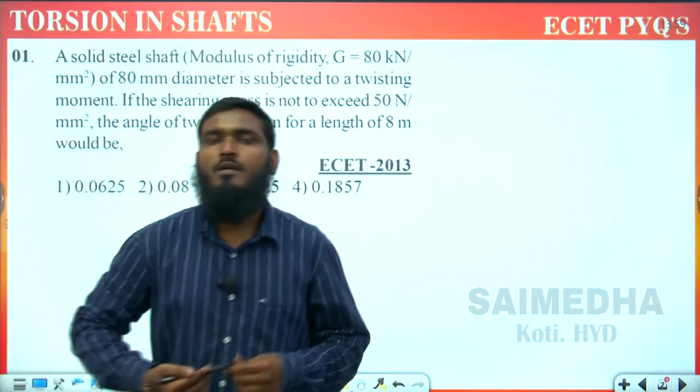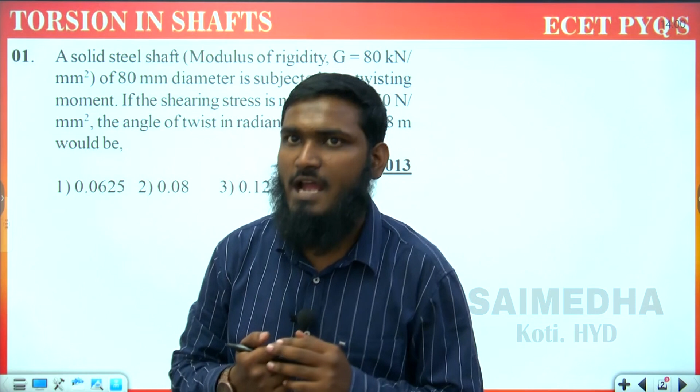In this video we are going to discuss the previous year ECET questions on the topic of torsion in shafts from strength of materials. As we have completed all the remaining topics, this is the last chapter we are having in strength of materials, which is torsion in shafts.

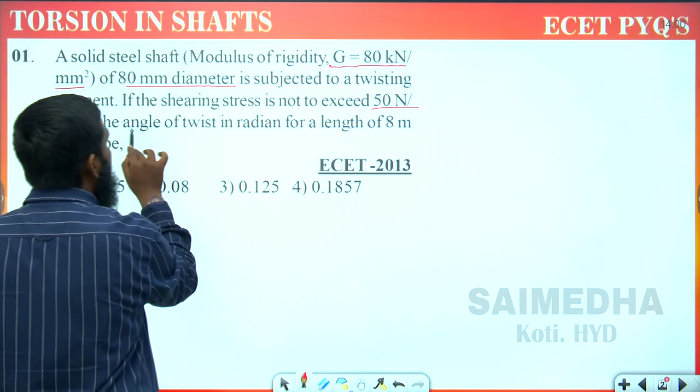Let us complete these questions also. Now, the first question: a solid steel shaft with modulus of rigidity G equals 80 kilonewton per mm square, 80 mm diameter, is subjected to a twisting moment. If the shearing stress is not to exceed 50 newton per mm square, find the angle of twist in radians for a length of 8 meters.

We have to find out the angle of twist over here. So first let us write down the given data. What is the given data we are having over here? It is the G value—first let us write the G value.

G value is equals to 80 kilonewton per mm square. The mm square part can remain as it is; only the kilo will convert. Converting this part, 80 into kilo means we take it as 10 cube newton per mm square.

Now the next part, what is given over here? Diameter is given, and it is equals to 80.

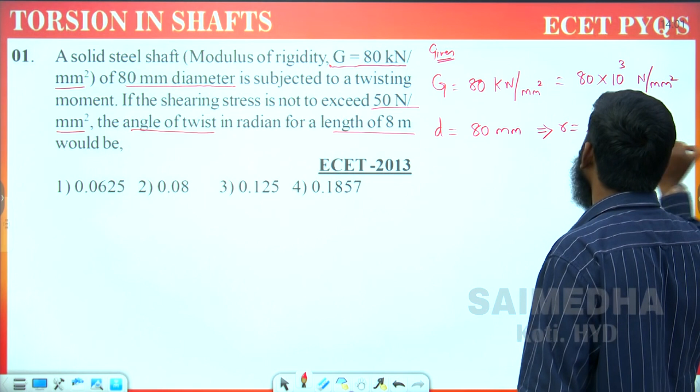Okay, 80 mm we are having over here, 80 mm we have taken. Then we have to find out the radius. Radius means what we can do now? D by 2 is equals to 80 by 2 means 40. So R value we are taking it as 40 mm. Okay, so 40 mm we have taken.

Now next part what we are taking over here, we are having it as shear stress. Shear stress is equals to 50 Newton per mm square. Okay, so it is in newtons and mm square is correct only.

Now next part, length. Length we are having it as 8 meter. 8 meter is equals to what we can write, 8 into 10 cube mm. Okay, 8 into 10 cube mm. This part we have taken over here. So all the given data we have written.

Now what we have to find, actually angle of twist we have to find out. So what is the main formula, general formula we are having? T by J is equals to tau by R is equals to G theta by L. What we are having? G theta by L.

Now according to the given data, let us check with which case we have to take over here. We are having G value, we have to find out theta value, L value we are having, tau value we are having, R value we are having. Okay, so let us take this case over here.

If you are taking this case, now if you want to find out theta value, theta is equals to what we can write now? Theta is equals to tau into L divided by R into G.

Okay, now let us substitute all the values what we are having. Tau value is equals to 50, into L value what we are having, 8 into 10 cube. Okay, now divided by R value we are having, 40, into G value what we are having. G value is equals to 80 into 10 cube. Okay, 80 into 10 cube.

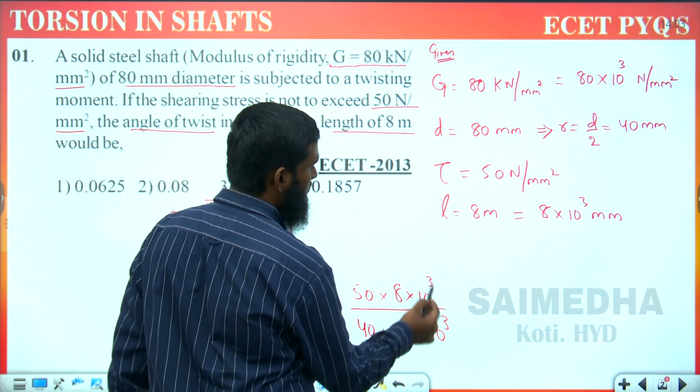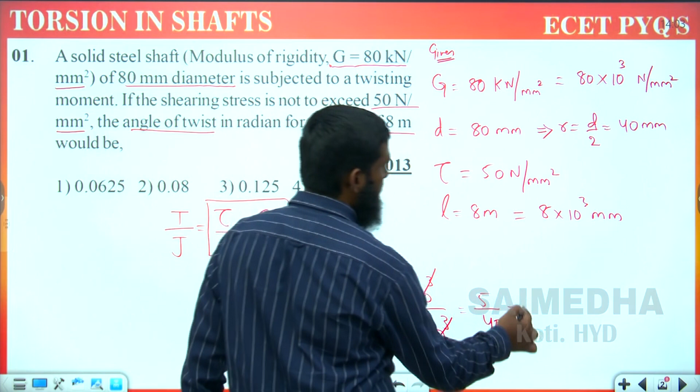All these values we have substituted. Now let us do the simplification. 10 cube gets cancelled, 0 gets cancelled, 8 gets cancelled. It is equals to 5 by 40. If you are dividing this part, what answer do you get? 0.125. Okay, what we are getting the answer? 0.125 means the third option.

Third option is correct. Now let us go with the next question.

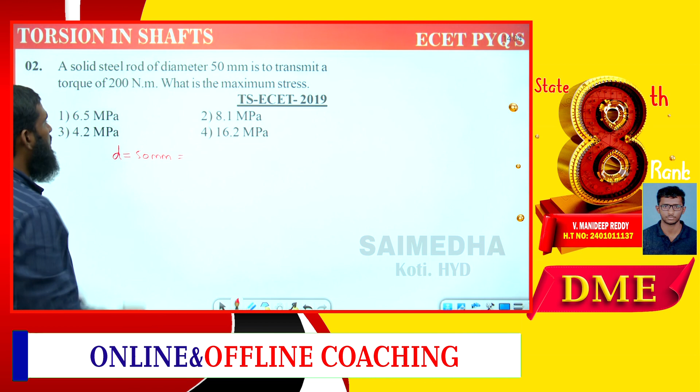Now next part, what we are having, torque we are having over here. Torque is equals to 200 Newton meter. So this part is in meter.

So let us try to convert the diameter also in meters only. So first let us write the radius what we are having. Radius is equals to 50 by 2. 50 by 2 means 25 mm. Okay, like this we have taken over here.

So if you want to convert from mm to meter, what we can write over here, diameter is equals to 50 into 10 power minus 3 meters, and radius is equals to 25 into 10 power minus 3 meters. Okay, this part we have taken over here.

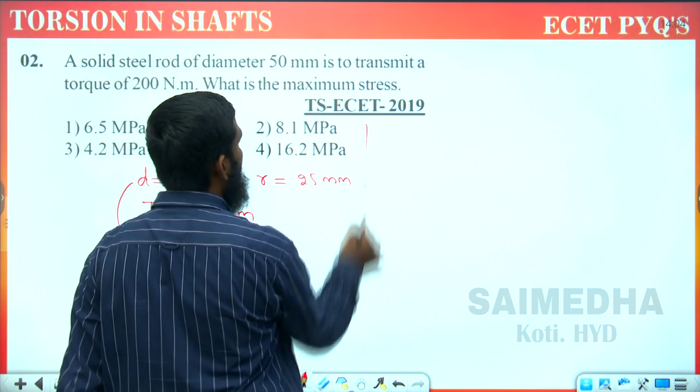Now what we have to find, actually maximum stress means according to this torque, torsion, twisting moment, we have to find out the maximum stress over here. So what is the formula we are having over here? T by J is equals to tau by R is equals to G theta by L.

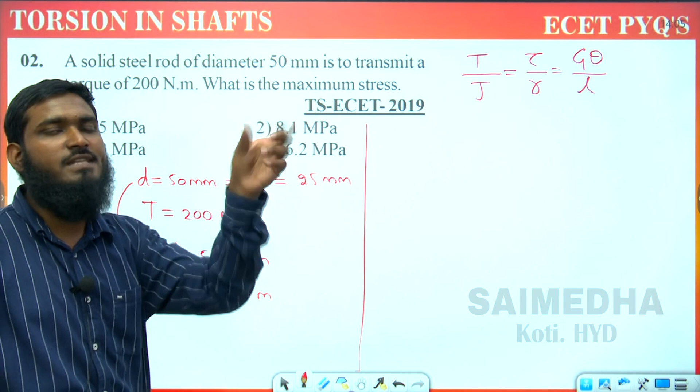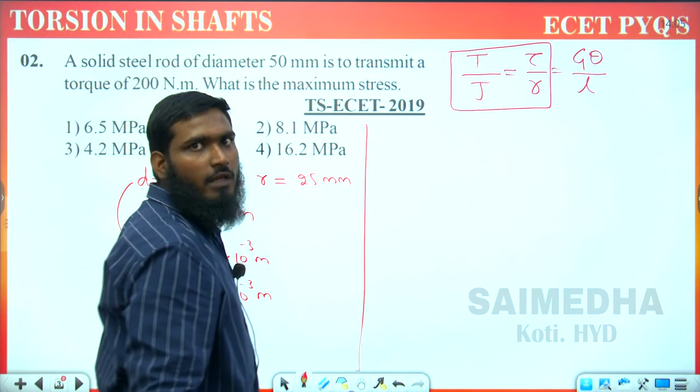Okay, now again from this part, which case we have to take, first case or second case? Now we are not having any theta value, L value, G value we are not having. So let us take this case over here. Okay, this case, T by J is equals to tau by R. If you are taking this part, now T by J is equals to tau by R, like this we have taken.

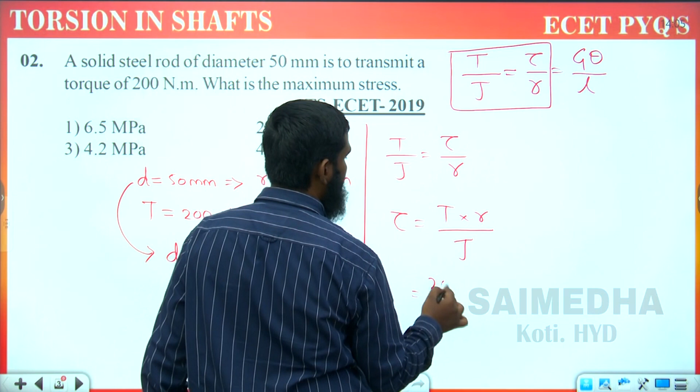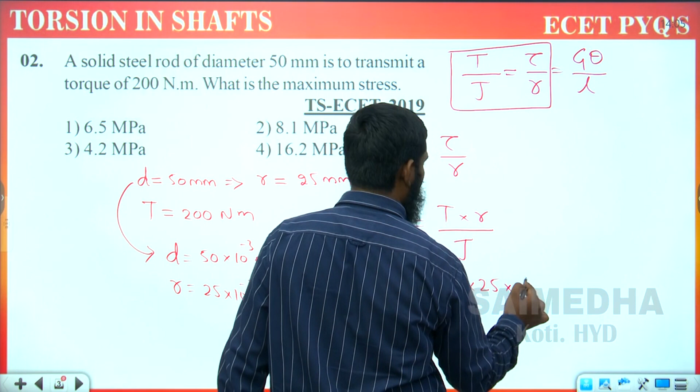Now we have to find the maximum stress. The formula is tau equals T into R divided by J. Let us substitute the values. T value is 200, R value is 25 into 10 power minus 3, divided by J, where J formula is pi d power 4 divided by 32.

So let us write this part as pi divided by 32 into d power 4. D power 4 means 50 into 10 power minus 3 whole power 4. This part we have taken. Now 32 goes to the numerator, and pi means 22 by 7, so that also goes to the numerator. Meaning 7 into 32 into 200 into 25 into 10 power minus 3, divided by what is left, 22 into 50 four times, so 50 into 50 into 50 into 50, four times we have taken, into 10 power minus 12.

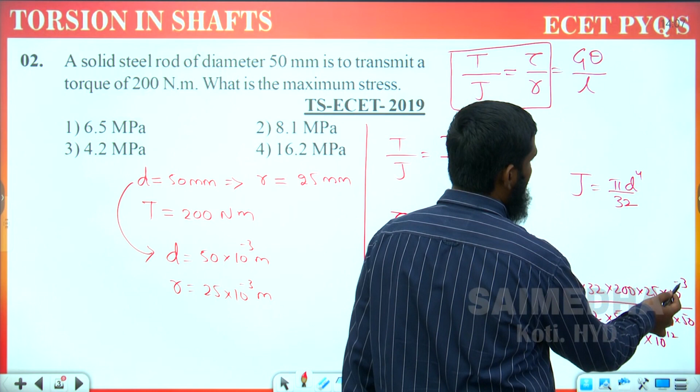So what will happen, listen carefully now. 1, 2, 3, 4 zeros we are having. If you cancel these 4 zeros, it becomes 10 power 8. This part is 10 power 8. Now next, this 10 power minus 3 we are having, 2 zeros get cancelled, giving 10 power minus 1. So all this cancellation we have to do. After getting this cancellation, what do we get as the answer?

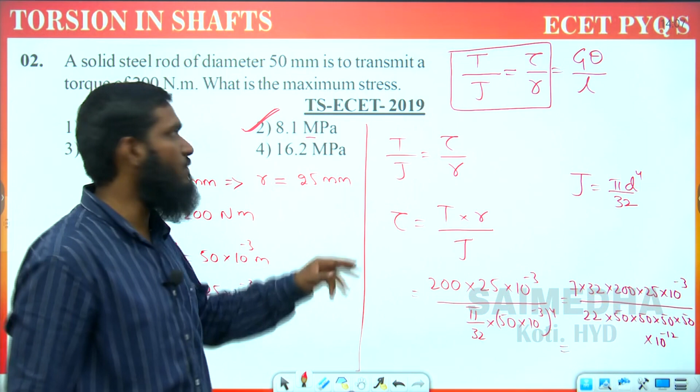It will be approximately equal to 8.1 megapascal. Actually you are getting Newton per meter square there. But to decide this mega, we have to take it as 10 power 6. So we have to convert that part into mega and you will get the answer as 8.1 megapascal. So this second option is correct.

Now let us go with the third question. If a solid circular steel shaft of 2 cm diameter is subjected to a permissible shear stress of 10 kN per centimeter square, then find the value of the twisting moment.

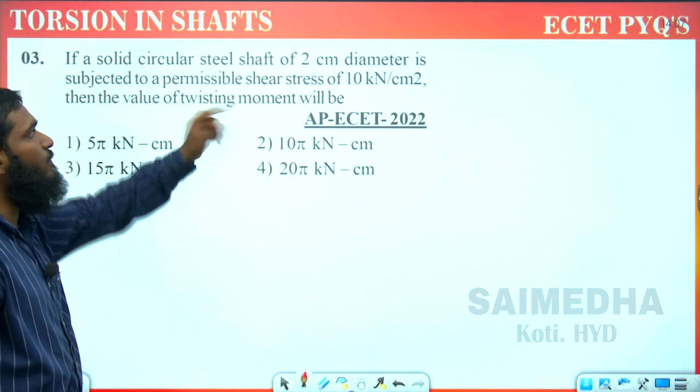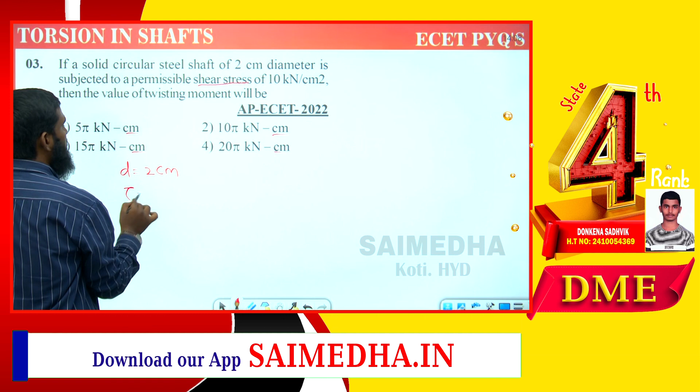Let us apply the same formula again. Diameter is equal to 2 centimeter. If you check the options, we are having centimeter only, so no need to change the units. Next, shear stress is equal to 10 kilonewton per centimeter square. Again the options are in kilo only, so no need to convert the units. So we are having d and tau.

Now we have to find the twisting moment, using the formula T by J equals tau by R equals G theta by L. We are not having G value, theta value, or L value, so we take only this case: T by J is equal to tau by R. Now we have to find the T value. If we find T value, it will be tau into J divided by R.

So T is equal to tau value, which is 10, into J formula which we just took, pi d power 4 divided by 32. So we take this, pi divided by 32 into d power 4. What is d value we are having? 2 power 4. Now next, what is R value we are having? R value means half of this diameter.

R value is equal to 1. So we have taken 1 over here.

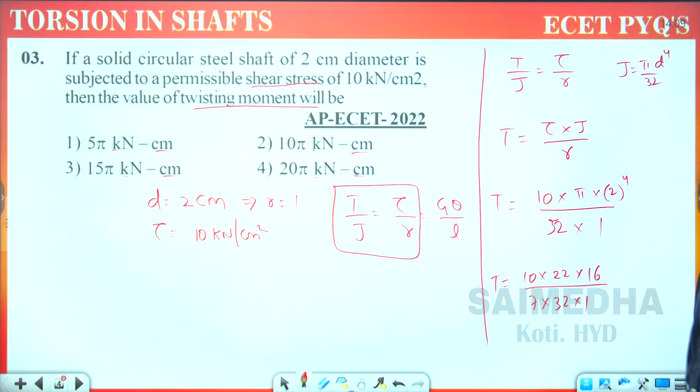Now if you are converting this pi, what will happen? T is equal to 10 into 22 by 7, divided by 32 into 1 into 2 power 4. 2 power 4 means what we are having over here? 16. This part you will be getting the answer after simplification of this.

But if you see the options, in the options it is given in terms of pi only, so no need to convert this pi. So we write pi as it is. 2 power 4 is 16. So 16 ones are 16, twos are 2, ones are 2, fives are... so what is the answer we are getting? 5 pi. That's why I am telling you again and again, before simplification, first check the options given, and depending upon the options we have to simplify that part. So the final answer we are getting is 5 pi kilonewton centimeter. First option is correct.

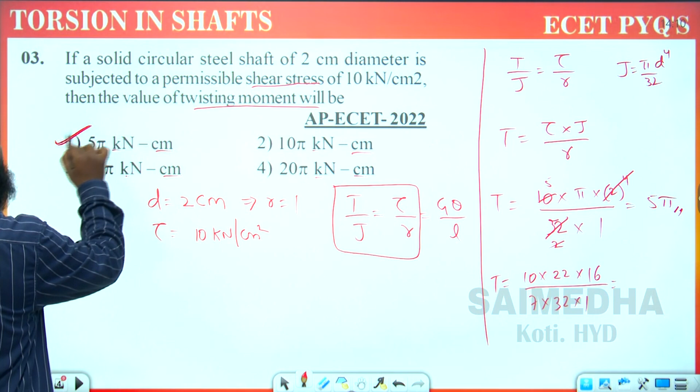Now next one, a key of 14 mm width, 9 mm height and 100 mm length is mounted on a shaft of 50 mm diameter. If allowable shear stress for the key material is 50 megapascal, what is the maximum torque that can be transmitted?

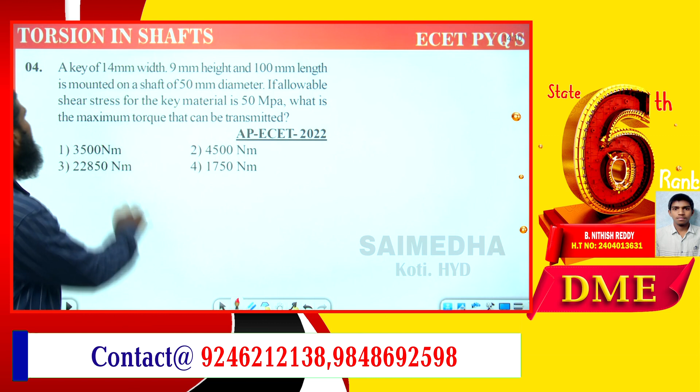Actually this key question is from design of machine elements, DME. Let us try to solve it. Torque, we have the formula: torque is equal to length into width into shear stress into radius, that is d by 2.

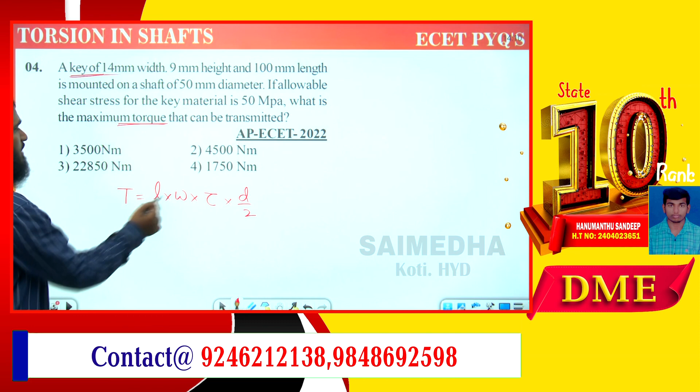This is the formula we have. Now let us substitute the values. Length is 100 mm. If you see the question options, they are given in meters, so let us convert that. Converting mm into meter, we write 0.1, or else, let's do 100 divided by 1000. Now what is the width we have? Width is 14, so 14 divided by 1000, this part we take into the formula.

Now what is tau we are having? Tau is 50 megapascal. 50 megapascal means we write it as 50 into 10 power 6, then it will be Newton per meter square. This one is correct. Now what is the diameter we have? 50 mm is given, so again we have to convert this part also. So 50, converting into meter means divided by 1000, into d by 2, like this we have taken.

Now let us try to cancel this one. So these 3 zeros and the 10 power 6 get cancelled, and these 3 zeros and these 3 zeros get cancelled. Now what is the leftover part we have? 2 ones are 2, 25s are... so 25 into 5 into 14, it is equal to how much? 1750. So the answer we are getting is 1750 Newton meter, meaning the fourth option is correct.

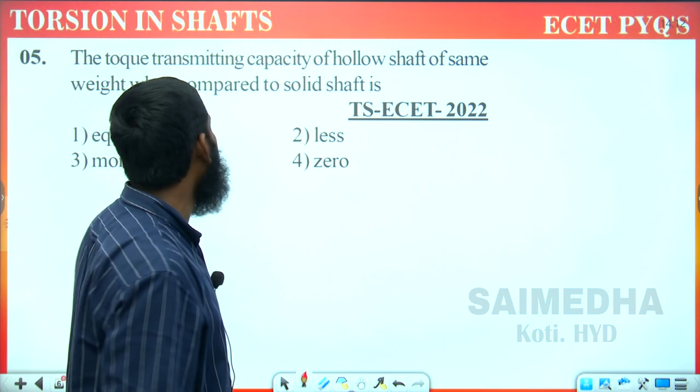Now let us go with the next question. The torque transmitting capacity of a hollow shaft compared to a solid shaft of the same weight. Now we are comparing solid shaft and hollow shaft, taking both as the same weight.

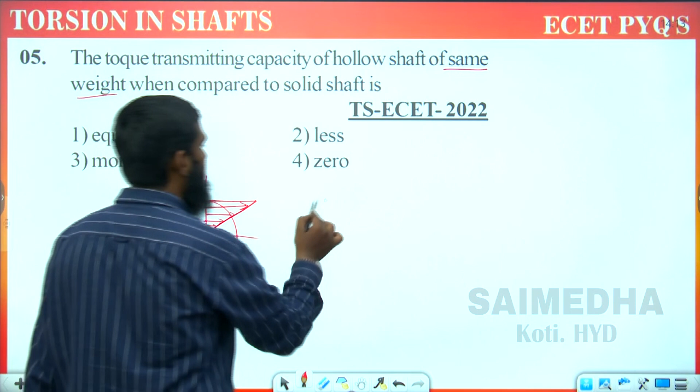So if we take this solid shaft, now we have the shear stress, which is maximum at the outer surface and zero at the middle center, for the solid shaft. This is the solid shaft we have taken. Now for the hollow shaft, if we take it, what is happening?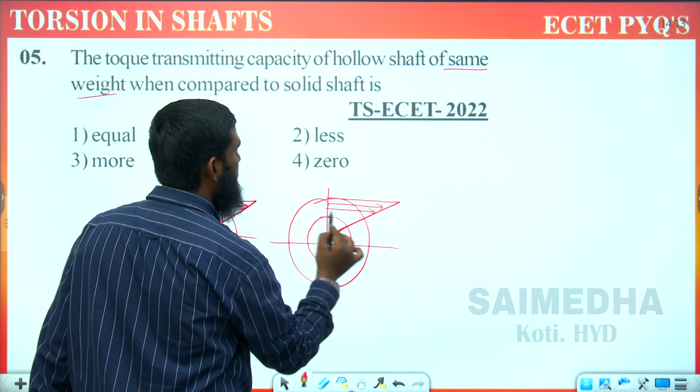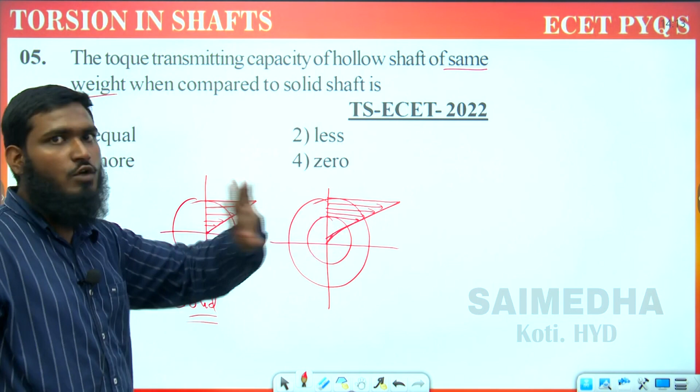So if you have taken this part, now we are having maximum shear stress at the outer surface, but at the center we are not having any shear stress. Minimum at the inner surface, maximum at the outer surface, but it is not becoming zero. As it is not becoming zero, what is the meaning of this? It means this is a hollow part we have taken.

Now what is the meaning of this part? Means ZP. What is the meaning of ZP we are having? Z means section modulus, and Z always represents strength. Now what is the meaning of ZP? ZP means polar section modulus.

So this ZP value, the polar section modulus value of the hollow shaft, will be greater than the solid shaft. So whenever the ZP value of the hollow shaft is greater than the solid, the strength will be more. If the strength is more, what can we write?

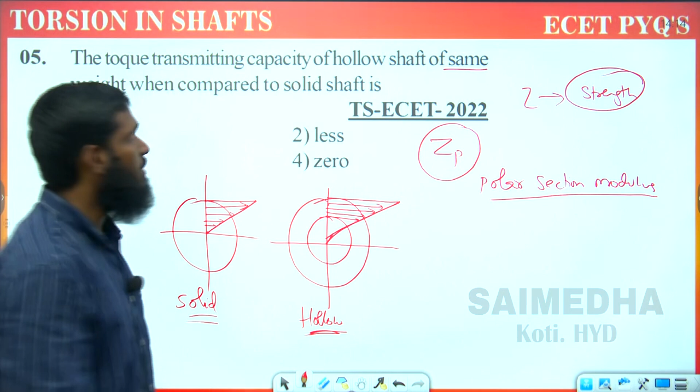Therefore, torque transmitting capacity of hollow shaft is more, it is greater than the solid shaft. So which options are given: equal, less, more, zero — means the third option is correct.

Now let us see the next question. The power required to transmit a torque of 600 Newton meter at a speed of 700 RPM is. Now what do we have to find? Power. So in the same topic we have the power formula: Power equals 2 pi NT divided by 60.

Now let us substitute the values. It equals 2, written as it is, pi means 22 by 7. Before substituting this pi value, first check the options — if pi is directly given in the options, no need to write 22 by 7, otherwise write it as 22 by 7. Now what is the N value we are having? N is speed, 700.

So we take 700 into T, T means torque, we have it as 600, divided by 60. The zeros get cancelled, so it equals 2 into 22, which is 44, and we are having it as 10 cubed.